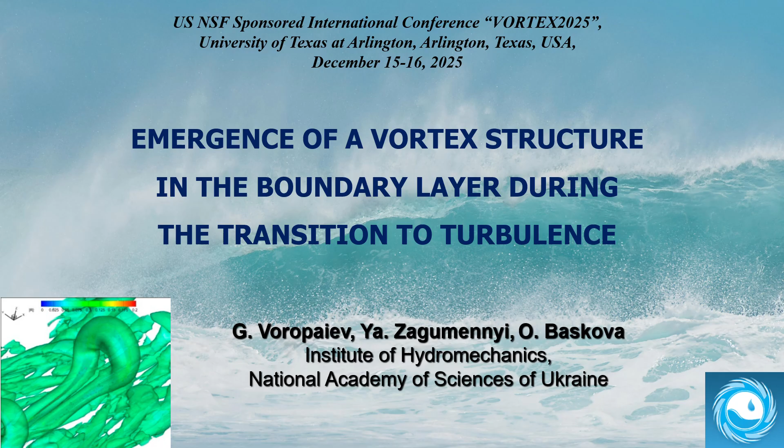We share the importance of the questions raised about vortices. A vortex is not such a separate element introduced from the outside, but an integral part of a flow, arising when the flow itself changes due to various dynamic or thermal factors. The relations between the parameters of the resulting vortex structures and dynamic or thermal factors is a subject of study in hydro and aeromechanics.

This talk presents the results of numerical simulation of the emergence of vortex structures in the boundary layer on a plate and in the initial section of a pipe at transitional Reynolds numbers. In the first case, the laminar turbulent transition processes are studied on a locally deformable surface. It is such a flow control method inspired by dolphins, which are capable of dampening and redistributing boundary layer disturbances due to viscoelastic properties of their skin and peculiarities of their movement.

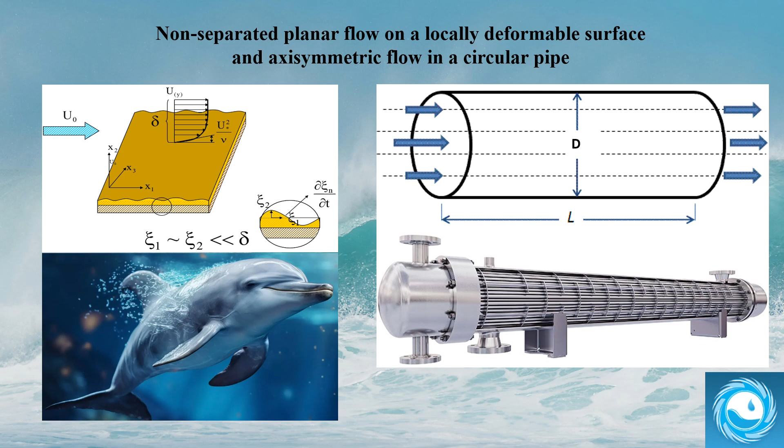Also, the processes of transition from laminar to turbulent flow in smooth pipes is considered. This process is often encountered during the startup phases of heat exchangers. We found a number of common features in these two different problems as to the emergence of vortex structures in the boundary layer during the transition to turbulence.

We consider three-dimensional problems of incompressible fluid flows on a flat plate, locally disturbed by forced regular surface oscillations according to a given analytical law, and a flow in a pipe with possibility of changing the dynamic viscosity coefficient in a non-isothermal medium. The classical system of unsteady three-dimensional Navier-Stokes and continuity equations for incompressible viscous medium is considered.

For a pipe flow, additional energy equation is considered with the dynamic viscosity coefficient described by the following polynomial, taking into account the non-isothermal formulation of the problem for considered temperature range. The boundary conditions are no slip for velocity components at fixed walls, initial velocity profile specified at the inlet, and the outflow at the outlet. It is Neumann boundary condition with zero gradient for all flow variables.

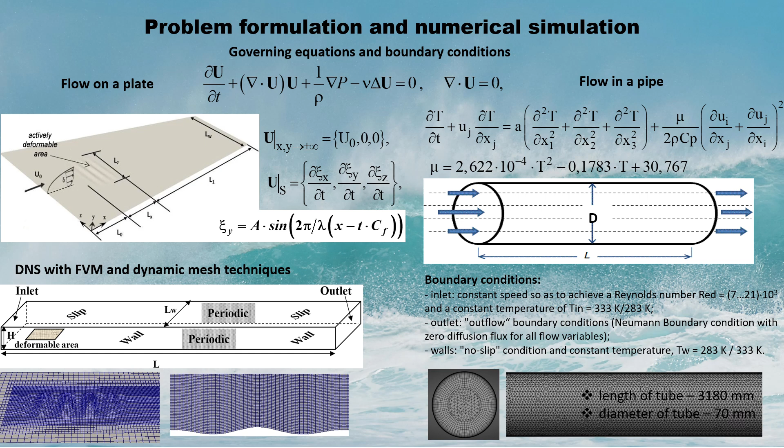A certain area of a plate located at some distance downstream from the inlet is actively perturbed in the form of a traveling wave, where A, lambda, and Cf are the amplitude, length, and phase speed respectively. Direct numerical simulation of the problem is carried out by finite volume method with total number of computational cells up to 3.5 million. For numerical simulation of the flow on a deformable surface, we use dynamic mesh techniques, which allow automatically rebuilding the computational mesh during runtime in accordance with an unsteady change in geometry of the deformable area.

Therefore, we set the task of studying the nonlinear response or receptivity of a laminar boundary layer to forced local surface oscillations in the form of a traveling wave. The main parameters of this traveling wave are the amplitude, wavelength, and the phase speed. Based on the neutral stability curve, we select the study parameters. Specifically, in this study, we consider long wavelength disturbances with dimensionless values of 5 and 7.5, and a phase speed in the range from 0 to 0.5 of free stream velocity, which are clearly located both within and outside the neutral curve.

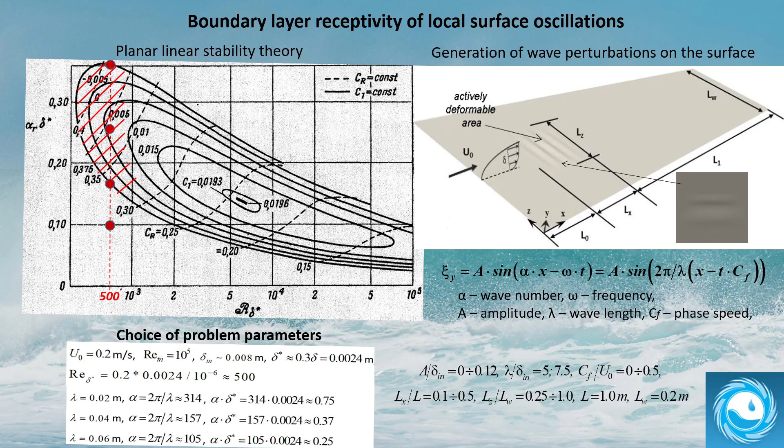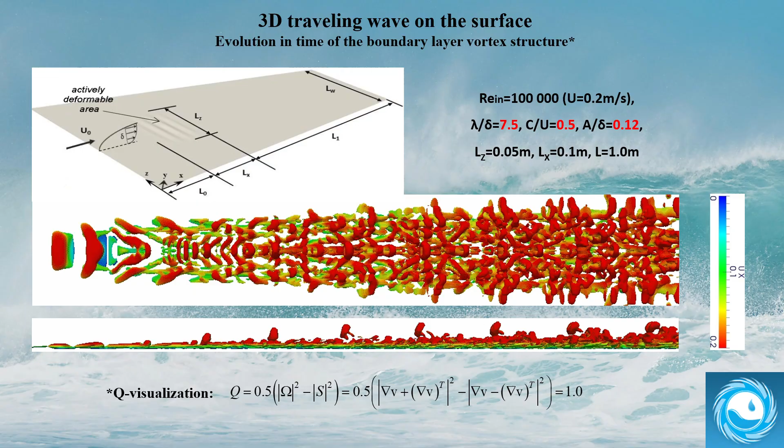In the side view, it's clearly seen that the head part of the lambda structure separates and rises to the boundary layer outer region, gradually destroyed as moving downstream. Despite the primary planar structure of the initiating traveling wave, the boundary layer doesn't preserve downstream the respective planar structure and is necessarily transformed into a system of three-dimensional multi-scale vortex structures with a mostly longitudinal orientation.

As the phase speed increases and the traveling wave amplitude decreases, the front width of the generated wave fundamentally changes the wave vortex pattern. In the planar case, the transition scenario escapes the stage of a large-scale lambda-shaped structure formation, while maintaining the phase speed and amplitude of the initiating traveling wave, but the final stage is essentially independent of the initial perturbations.

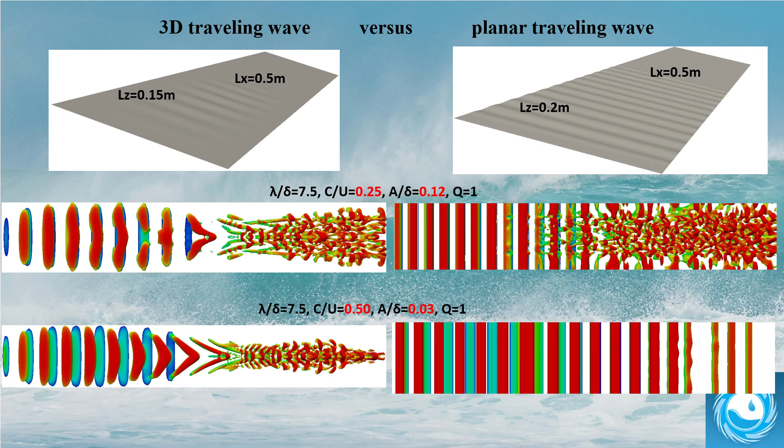For a non-zero phase speed of the traveling wave on the surface, the transversal vortices lose stability even in the traveling wave zone. Transversal oscillations with a wavelength of the order of the traveling wave appear on the vortex shell. The amplitudes increase and the transversal vortex loses stability.

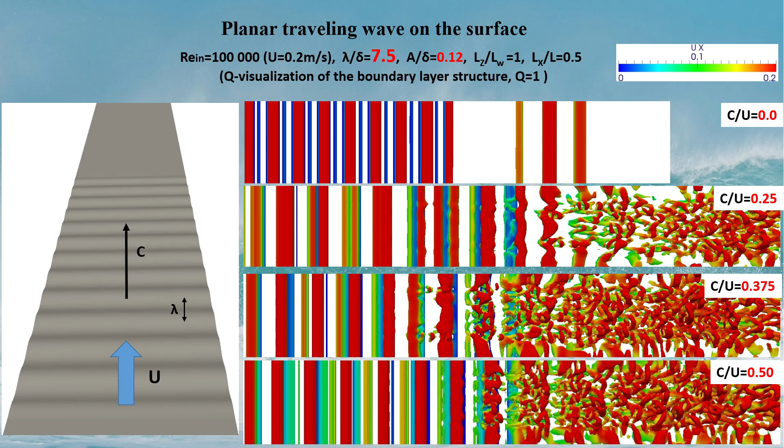As the generated traveling wavelength increases to 7.5, the stability of the transverse vortex more clearly reflects the change in the phase speed. At low phase speed, the transverse vortex loses stability in the wake of the generated section, and as the phase speed increases, the vortex flow pattern replicates the instability scenario observed at a shorter wavelength.

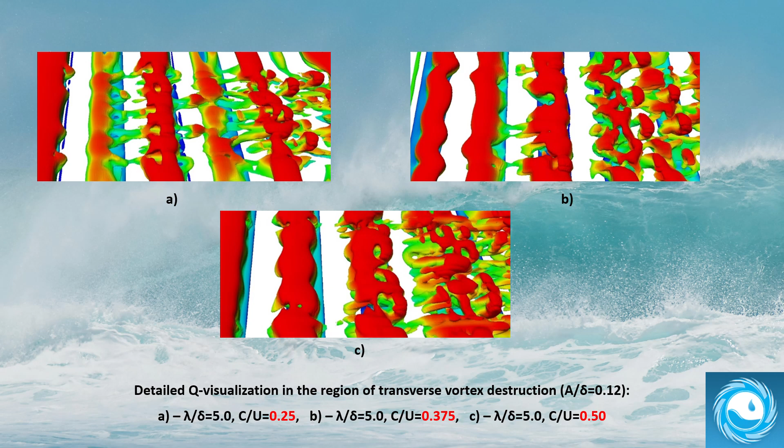Here you see detailed Q visualization in the flow region with destruction processes of a planar transverse vortex. It is clearly seen that the initial stage of the transverse vortex destruction goes through the appearance of a transversal wave with wavelength of an order of the primary traveling wavelength with a rapidly growing amplitude.

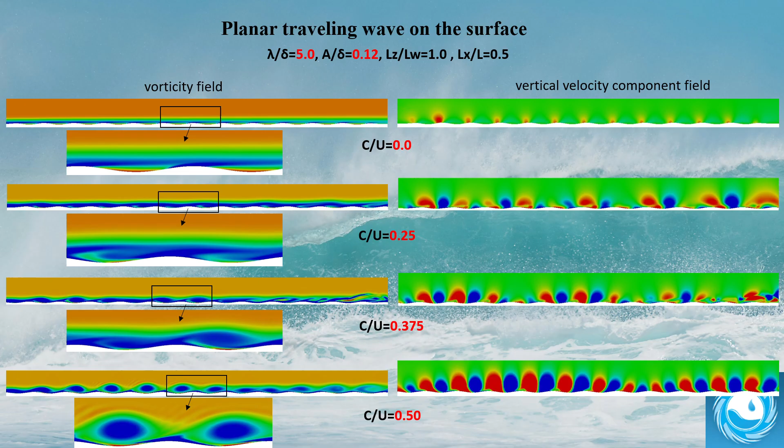All the cases show different vortex structures in the wake, but there are a number of common features in all the figures. The common feature is the transition of a transverse vortex formed in the traveling wave troughs into a three-dimensional lambda-shaped vortex structure with its subsequent selective transformation to chaos or a practically deterministic state.

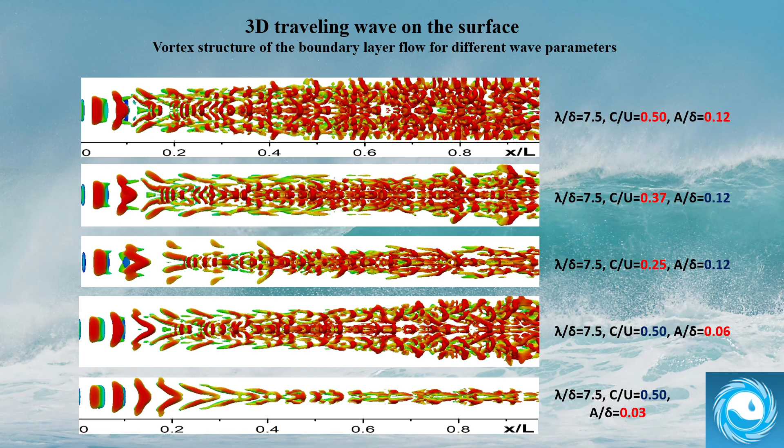From the next slides, one can study in detail the boundary layer vortex structure for different traveling wave parameters. Here are visualizations at top, angle, and side views, as well as in the center and the periphery longitudinal cross sections, and a detailed enlarged flow fragment.

For the case of the highest traveling wave amplitude, the boundary layer is the most disturbed and span-wise extended when developing downstream. In the enlarged picture, we see, along with the main lambda structure formed in the center and gradually destroyed downstream, a set of smaller scale lambda structures formed and developed in the periphery region. In general, we see a complex multiscale three-dimensional vortex structure of the boundary layer becoming more and more chaotic downstream.

At lower traveling wave phase speed, there is less intensive growth of the boundary layer disturbances downstream. The multiscale lambda structures are mostly concentrated around the central flow region, and there is a weak span-wise extension of the wake downstream.

At the lowest traveling wave phase speed considered, the lambda structures are fully concentrated in the central region, and there is no span-wise extension of the wake downstream. There is also no separation of the lambda structure head part, which doesn't rise to the boundary layer outer region and get destroyed as for the higher phase speeds.

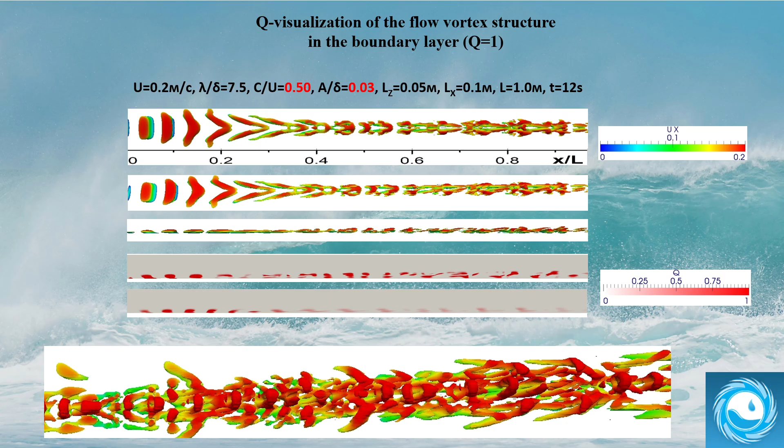The multi-scale lambda structures are mostly concentrated around the central flow region, with a weak span-wise extension of the wake downstream. At the lowest traveling wave amplitude considered, the boundary layer disturbances are fully concentrated in the central region, and there is no span-wise extension of the wake downstream.

This slide shows change in drag on a locally deformable surface for the corresponding parameters of the traveling wave. It is obvious that a change in the flow vortex structure leads to corresponding changes in the viscous drag on the surface. On the deformable surface, there are zones with drag reduction, and the greater the traveling wave amplitude and phase speed, the clearer the drag reduction zones, where the transverse vortex maintains its shape and intensity.

From the moment of formation and during the collapse of lambda structures, there are only streaky zones of reduced drag compared to that of a conventional boundary layer at the same Reynolds number. A striped structure of the drag reduction on the surface evidences the fact that the boundary layer doesn't preserve the primary planar structure of the initiating traveling wave and is necessarily transformed into a system of three-dimensional multiscale vortex structures with a mostly longitudinal orientation.

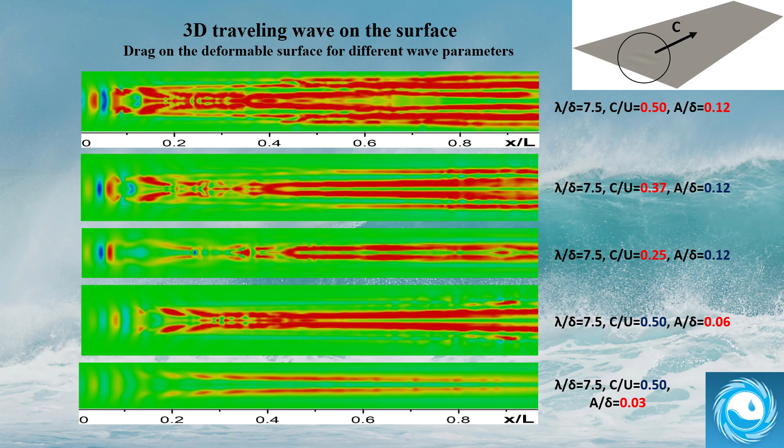Here are patterns of the drag distributions on a locally deformable surface for different phase speeds of the traveling wave for the corresponding case of planar traveling wave on the surface. For a zero phase speed of the traveling wave, or for a stationary rough surface, there are almost no drag perturbations on the surface in the wake flow.

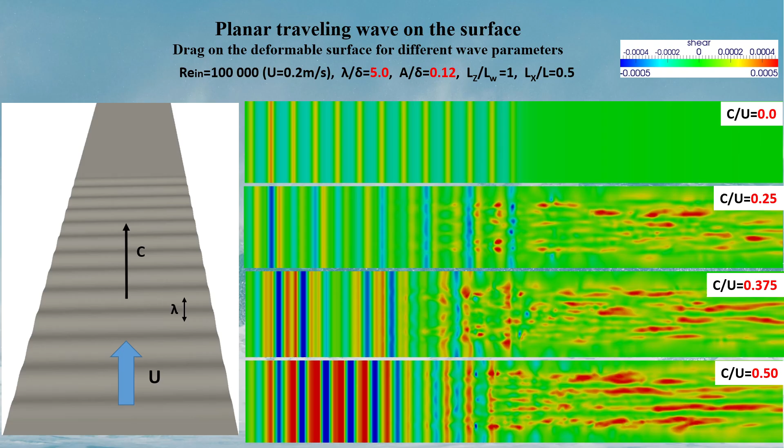With increase in the phase speed, there is a distortion of the transverse strips, which reflect the emergence of transversal instability waves, and in the wake flow region, the drag distributions on the surface take a striped structure with a mostly longitudinal orientation.

The next slides show a flow vortex structure formation in a pipe for non-isothermal flow. The processes of emergence and development of the boundary layer perturbations on a smooth flat surface and at the beginning of smooth pipes have much in common, provided that the thickness of the boundary layer formed on the pipe surface remains smaller compared to the pipe radius.

Therefore, the process of transition from laminar to turbulent flow regime in a pipe can be conditionally divided into transition stages. Stage 1, oscillation initiation. Stage 2, development of regular axisymmetric pressure and vorticity waves, which almost completely correspond to the linear stability theory of emergence of disturbances and their development. Stage 3, development of a deterministic pressure wave and vorticity with torus shape. Stage 4, destruction of the deterministic vortex structure.

At the inlet of the pipe, as at the leading edge of the plate, the flow contains the entire frequency spectrum of the boundary layer's natural disturbances, and taking into account their small magnitude, high frequency disturbances quickly decay, as shown by the visualization, but low frequency disturbances remain in the boundary layer. Their propagation downstream is recorded at the corresponding Reynolds number in the form of discrete traveling waves with a certain length and phase speed.

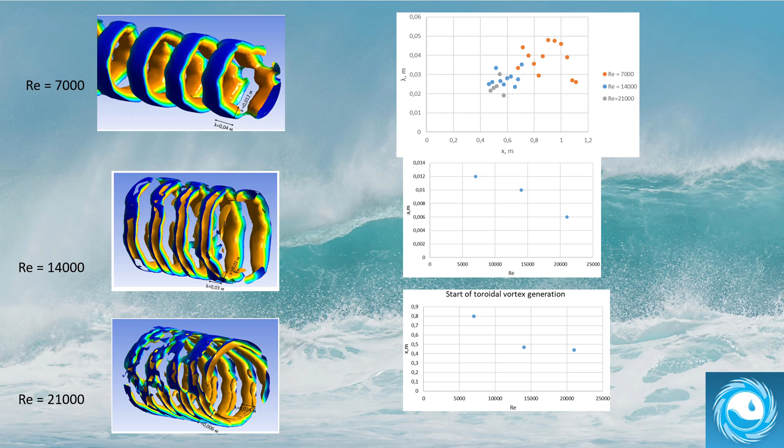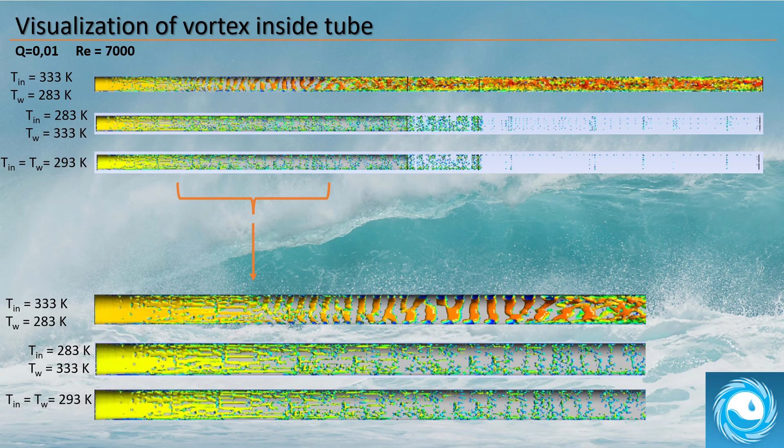Visualization of the vortex structure in the pipe for isothermal flow and in the case when the inlet temperature is greater than the wall temperature and vice versa, showed a significant influence of the viscosity gradient on the shape and scale of the vortex structures and the stability loss by the flow and the transition process itself. Thus, toroidal structures are observed only in the case of a negative viscosity gradient in the near wall zone. In the case of a positive viscosity gradient or isothermal formulation of the problem, the transition occurs without zones 2 and 3. The structures formed during the transition are small scale.

If analyzing the spectral characteristics obtained on the basis of the pressure and drag values, then the following trends can be seen in zone 3. With increasing Reynolds number, the signal power increases, and one significant frequency is distinguished. At the same time, the significant frequency gradually increases from 2 Hz to almost 5 Hz with increasing Reynolds number.

At the end of the pipe, in the zone of chaotic disturbances, the spectra show a tendency to expand into the region of higher frequencies. The difference in spectral power, although remaining significant, becomes smaller in absolute values as compared to the inlet section of the pipe.

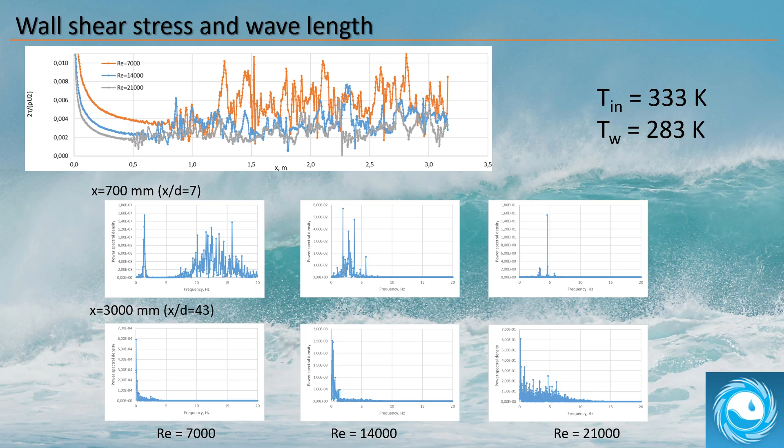When the flow is non-isothermal, a thermal boundary layer is formed on the pipe walls, which leads to a corresponding significant change in the dynamic viscosity coefficient. Thus, in water, when the temperature changes by 30 degrees, the dynamic viscosity coefficient changes twice. In the considered temperature range, at a negative viscosity gradient in the near-wall zone, the steady-state velocity profile differs significantly from the parabolic one by the presence of an inflection point and a small thickness.

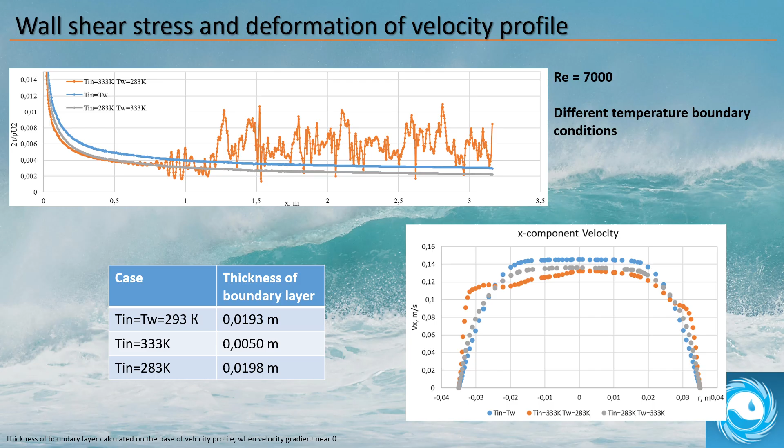And vice versa, we obtain a more filled velocity profile at a positive viscosity gradient. Therefore, while maintaining the flow rate, the cold wall slows down the flow near the wall, but accelerates the flow core, thus increasing the required pressure gradient.

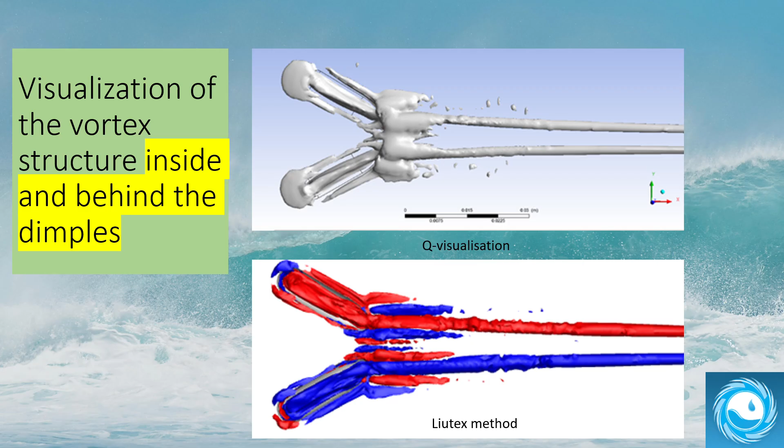And finally, conclusions. Based on direct numerical simulation of emergence and formation of a vortex flow structure in a laminar boundary layer on a flat surface and in the initial section of axisymmetric pipe, one can make the following conclusions. Emergence of wave disturbances in both the external flow on a plate and the internal flow in a pipe occurs identically and corresponds to the linear criterion of convective stability of a laminar boundary layer.

Transformation of the first plane mode (plate) and the first axisymmetric mode (pipe) of the vorticity wave into a transversal and toroidal vortex, respectively, occurs according to the same scenario, with the dimensions and the convective stability time decreasing with an increase in Reynolds number.

The deformation and destruction of the transversal and toroidal vortices occurs in a similar manner, with the formation of transversal and azimuthal oscillations on their surfaces, an increase in their amplitude, and the subsequent formation of lambda-shaped structures at the vortex antinodes. With increase of Reynolds number, the analogy between the vortex structure of the near-wall layer on the plate and in the pipe is broken, with the helical mode with the same vorticity wavelength appearing in the pipe.

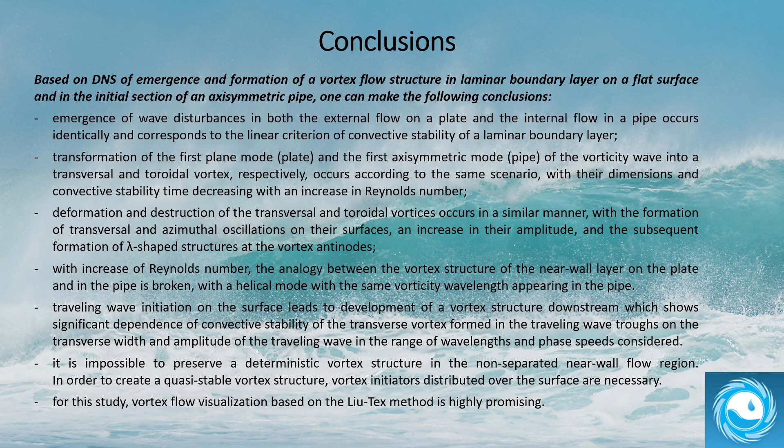It is impossible to preserve a deterministic vortex structure in the non-separated near-wall flow region. In order to create a quasi-stable vortex structure, vortex initiators distributed over the surface are necessary. For this study, vortex flow visualization based on the Liutex method is highly promising. Thank you for your attention.